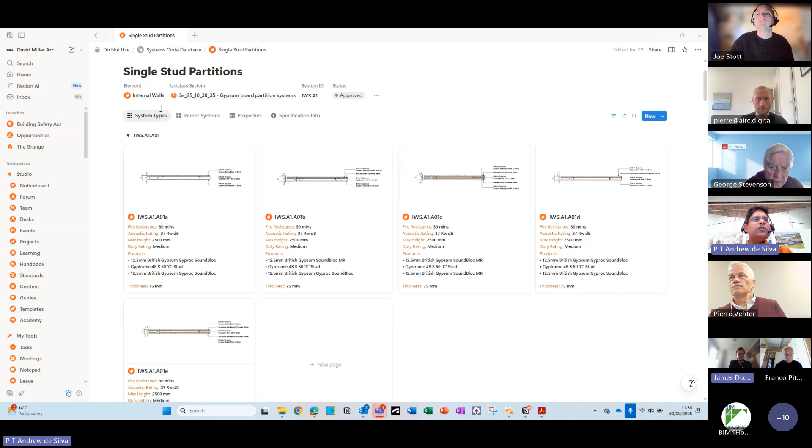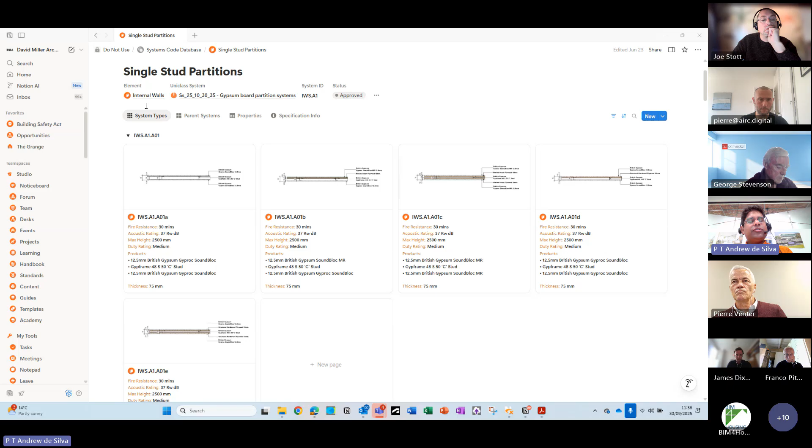Yeah. So we're creating content with the aim of making sure it's consistent, compliant, and aligned to the specification or digitally tagged. So this is the view into, for example, our internal walls. But within our content library, we've created not just things like walls, ceilings, etc., but also assemblies. So that could be, for example, bathrooms, which are compliant in terms of their geometrical relationship to different parts, the sink and the bath and the WC, etc.

So I think this is picking up on some of the things that have just been talked about, where Andy from the team has created a plugin into Revit, which means that all of our info is held in Notion here, but within Revit, the team members, and we're also changing the way that the team is structured.

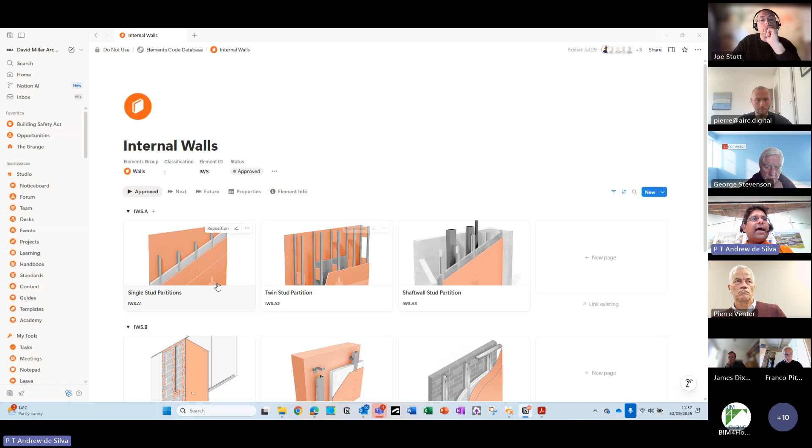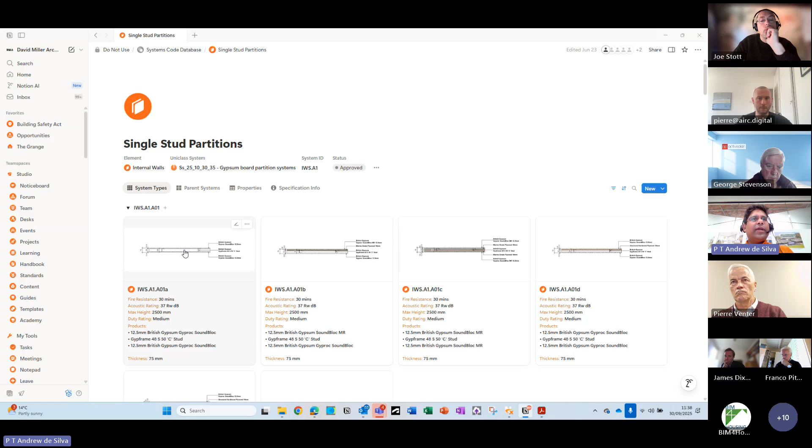But the idea is that you can go into this library, the content library that we've created, drill down into what is required from that component or assembly, and then choose the relevant one. And then when you bring it in, it's got the information, but it's also got the geometry, and it's also got things tagged and specified, linking it to our master specification already.

So that's something we've tried to do, and it's more powerful when we've got the assemblies, because there are so many permutations of an accessible Part M4(3) bathroom, and you would waste a lot of time if you're asking junior members to read Part M, trying to unpick the requirements, and then design it into one of the schemes.

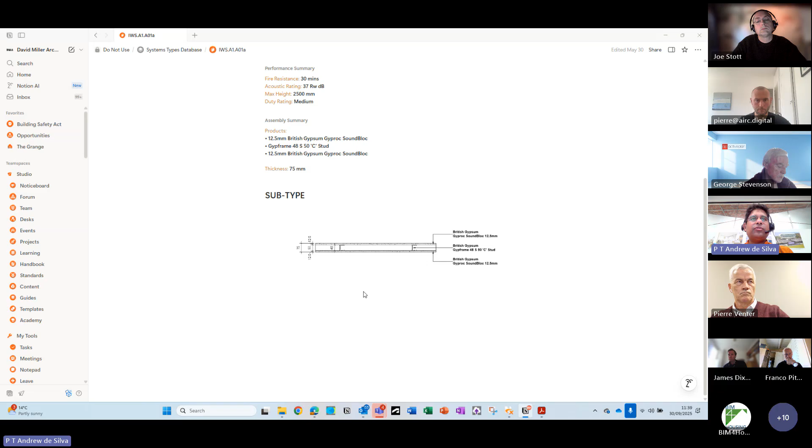So we're trying to get, whatever the sector of the project, a large amount of it pre-authored and created, which can then be brought in. Clearly, there's going to be bespoke elements, because all projects will have bespoke elements, and that's where the architectural interest or the site-specific requirements kick in.

And then Andy and Lee, who's the head of spec, and the R&D team are working to make sure that it is given a particular name, as you mentioned, so then it does allow a door to be aligned to the ironmongery set, to the specification, etc.

So that's something we've been doing to try and standardize the components and make sure they're all working or compliant, which helps us as a practice with the Building Safety Act, but also just generally meeting the employer's requirements or the regulations. So that's something that's been working for a long time.

Then coming back to the project I mentioned, this is a scheme, let's get right into it.

Sorry, James, got your hand up. I didn't realize it did that. I didn't realize it gave an automatic. Sorry about that. I love that.

The one quick observation: if you have the BG White Book product data reference in there, because that is the one thing that commercials will use to talk back. We do, yeah, we've got that in there as well.

So that's embedded. In terms of our little ecosystem of software, we've got Revit, we've got NBS for the specification side of things, and then Notion is what you saw. We use Notion like an intranet for all sorts of things within the practice, all centered around storing information in database format so that it can be machine readable, it can be filtered, it can talk to each other.

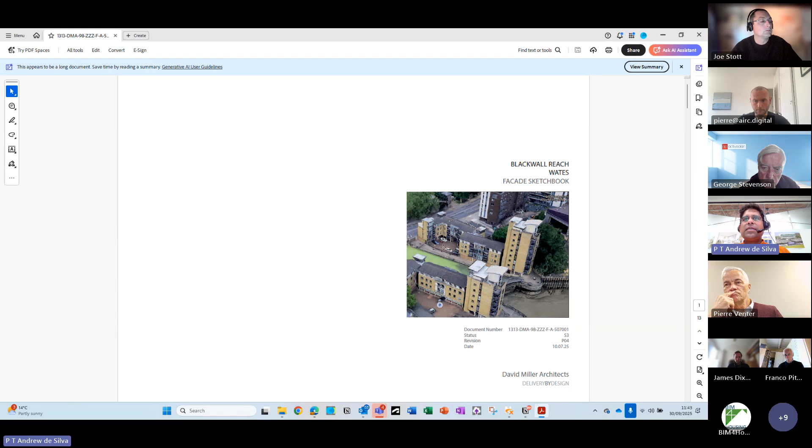trying to do generally. The good thing is that most of the building, from a combustible point of view, is brick. So actually, we're only talking about specific areas, related to this timber cladding and the timber decking on the balcony. So as a first pilot project that the team are going through, it's a really good one to do, I think. But it just shows you what complexities there still are.

So Wates had a point cloud survey conducted for the entire estate. Picking up on Pierre, some of the things you do, that surveyor then produced a Revit model. As you can see, fairly basic in terms of internal elements, but externally accurate geometrically, which is the key thing. And from that, we've then generated this document called a sketchbook, essentially looking at what are the different details that we need to resolve.

So one thing is the timber cladding facade. We've tried to look at what's existing, keeping in mind we don't have any as-built information. There are areas in here. Sorry, is that intrusive? How do you know the wall build-up from the point cloud? Good question. I'll come on to that in a second. So we've made some assumptions in here. All of the red text is assumptions.

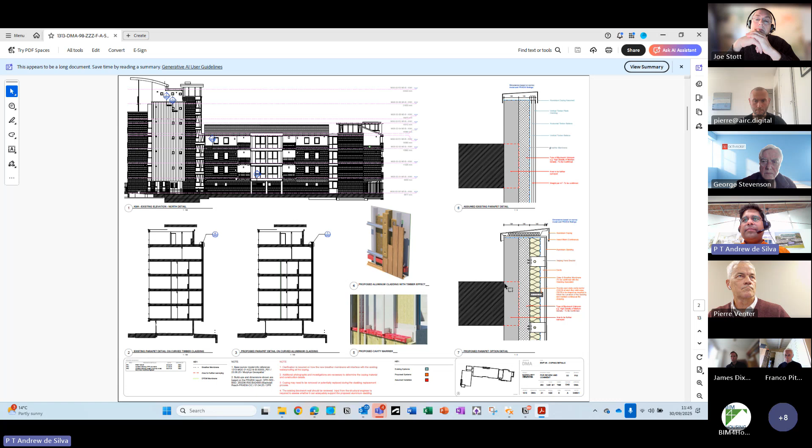Before we started, a company called OFR, who are fire consultants, did a fire risk assessment external walls review, which included some intrusive surveys on site from externally. So for example, that is why we know what the build-up of this timber cladding is. They cut holes in it. I'll show you some photographs in a minute as well. So some things we are able to know because they have been physically opened up. And then we were generating proposed build-ups, again based on a fair amount of assumptions, as you can see in the text here.

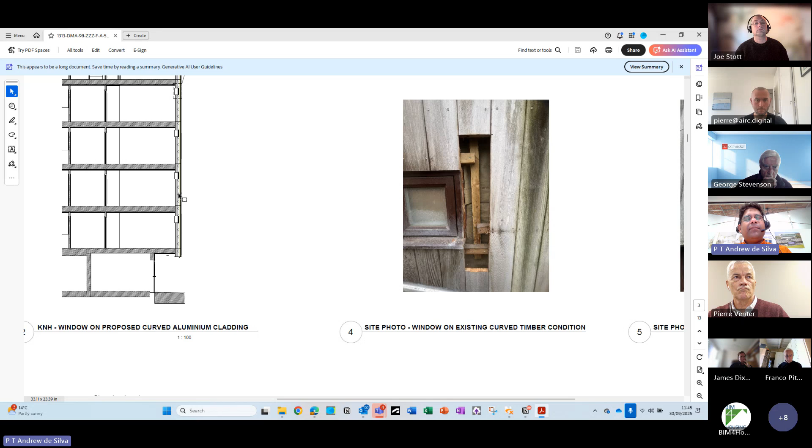So that's what we started off looking at. And you can see from these photographs, I'll just zoom in a bit. These were done by the initial fire risk assessment external walls. That enabled us to take the point cloud survey, which had generic wall thicknesses, 250, 280 mil thick. We then broke that model to create a more granular version of that external wall based on what we'd found. Still didn't give us the full picture. There were still areas which we didn't know, predominantly what is behind this breather membrane and how thick the blockwork is behind that. So that was basically where we started.

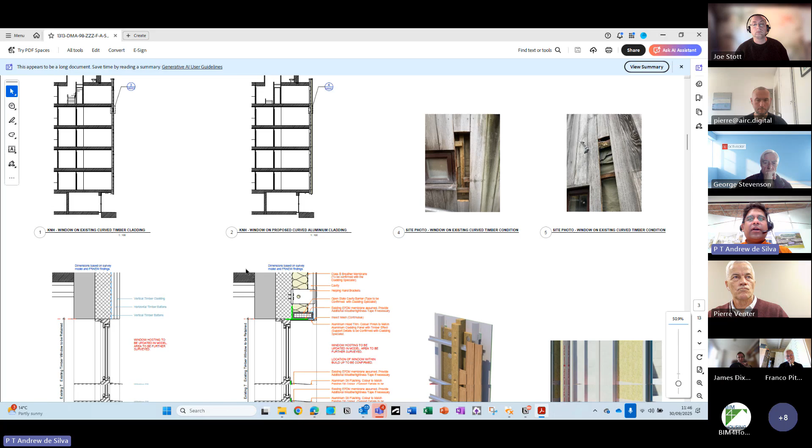Hold on a minute, so you can see that we've looked at those things and started to generate the existing and the proposed for all of the different areas within that curved timber. We also had some instances where there was an interface between the brickwork and render. So the areas that we were looking to do were essentially based on the fire risk assessment and areas that had to be remediated in order to make the risk tolerable, let's say. And the balconies all had timber decking, so that had to be removed.

And finally, there were areas where they found EPS insulation. Most of the scheme already had mineral, so that was good. But there were some areas, these projected bay windows, which had EPS insulation, for example. So again, we understood some elements of it, but not the whole picture. So that was quite interesting.

So these are the views from the 3D survey model. And we were identifying where there could be risks in terms of other EPS insulation, etc. that we may find. So I think what was good here is that even though the building was built only 25 years ago, from a data and information point of view, we had very little.

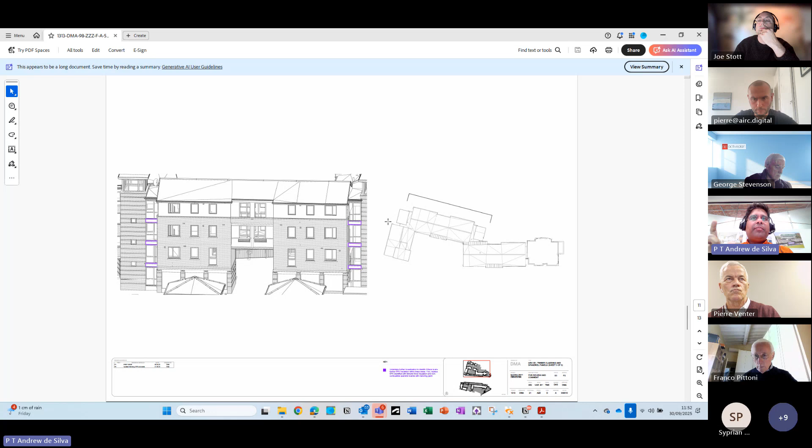No, I 100% agree, Cyprian. This document started a little while ago, based on what information we knew from the initial fire risk assessment external wall survey. What we were doing in this document is highlighting in all of these details, with the red, orange and blue text, which items we didn't know about, before we went back to site to do a further set of intrusive surveys because we had too many unknowns.

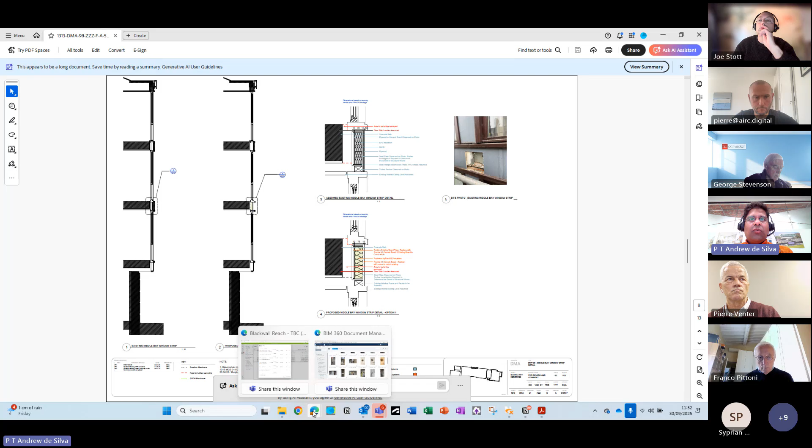So we had generated that report from the information we had at the moment. We then commissioned, with the structural engineer, ourselves and the fire consultants, a markup of those elevations to identify additional intrusive surveys we wanted, to pick up exactly that point you made about the unknowns. This might be a little bit slow to flick through the images. Let me just choose the one.

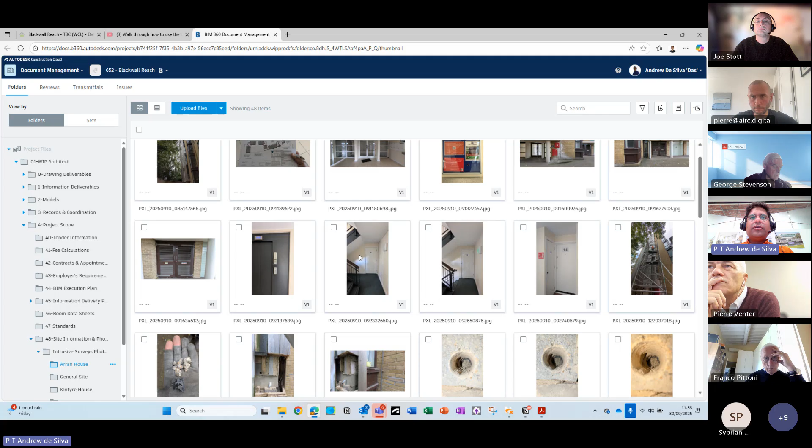So for example, because we weren't 100% sure, we knew what the timber cladding build-up to the blockwork was, but we didn't know beyond that. So we then went back and had a large area removed over two different areas in the two different blocks as well.

Again, to pick up on your point, Cyprian, about not making an assumption that just because it was built one way on one block, that it wasn't built the same way on the other block. So we opened up both of those blocks, and what was good is that we found the same build-up, i.e. essentially concrete slab, block work, these sort of steel posts, and then the timber cladding. There's no insulation on either of those.

What we didn't know was the thickness of the block work, because coming back to your point, James, the survey model was suggesting a 280 millimeter build-up from outside of the timber to the internal face of the apartments. And we were like, well, the numbers don't add up, because we had something like 50 or 100 mil timber, then that would leave somewhere in the region of 180 mil. But what was 180 mil based on? Was it based on, let's say, block work laid on its side, which was fairly common practice back in the late 90s, or was it 2 layers of block work, for example, or something else?

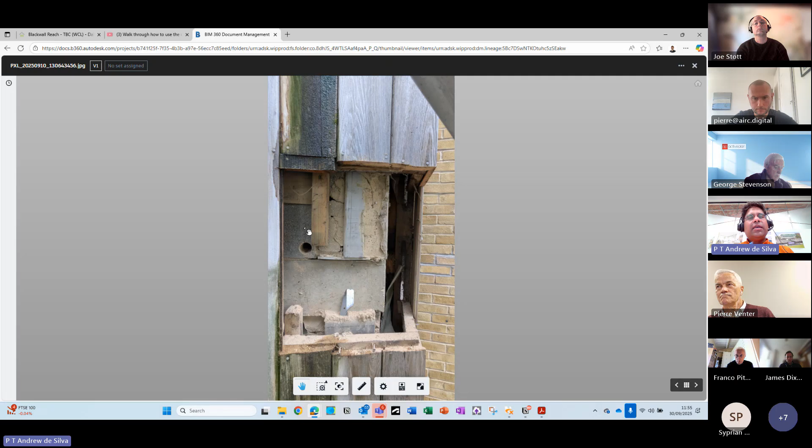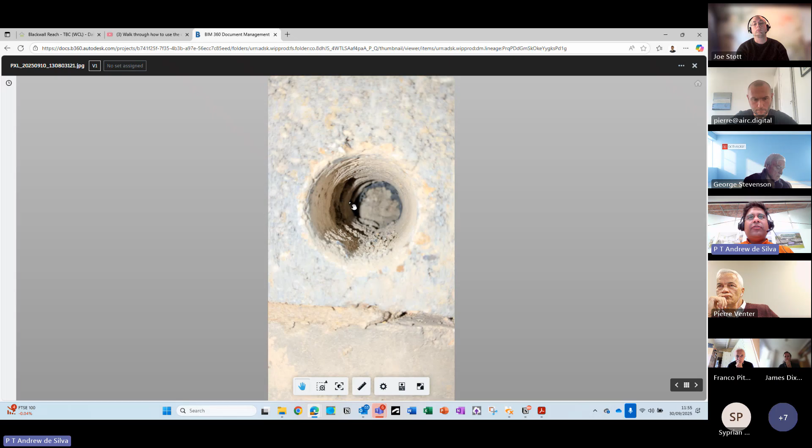So we had a core test done, which helped because the core drill was 150 mil thick. It showed that there was clearly one layer of block work, then a membrane, and then something else beyond it. Again, when you did the numbers, it wasn't quite adding up in terms of the survey model. So since this intrusive survey, we went through different parts of the different blocks. We have 3 different blocks that we tested on the opening up works. We're going to go back again to drill from the inside out, because there's still unknowns. And we're building that into our digital model from the survey that was done. So trying to fill the gaps, and each time we do some more intrusive surveys, we're picking up on something else that we need to know.

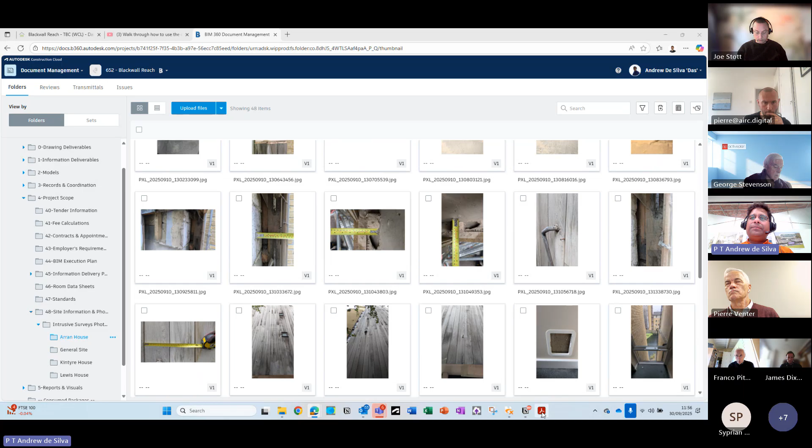To pick up that point, Syprian, that you made, I want to get to a stage where in our details and the specification, we don't have any red notes where we don't know what that build-up is. So all ambiguity has been taken out by carrying out surveys. The structural engineer is now doing the calculations in terms of fixing to the slab edge, which is probably the most realistic solution for the new rain screen cladding system. We can see from the surveys that the block work doesn't look like it's tied in very well to the slabs, etc. So we're bypassing that because there are too many unknowns, and going on to fixing to the slab edge. We've got to engage the specialist subcontractors, which will happen in the next couple of weeks.

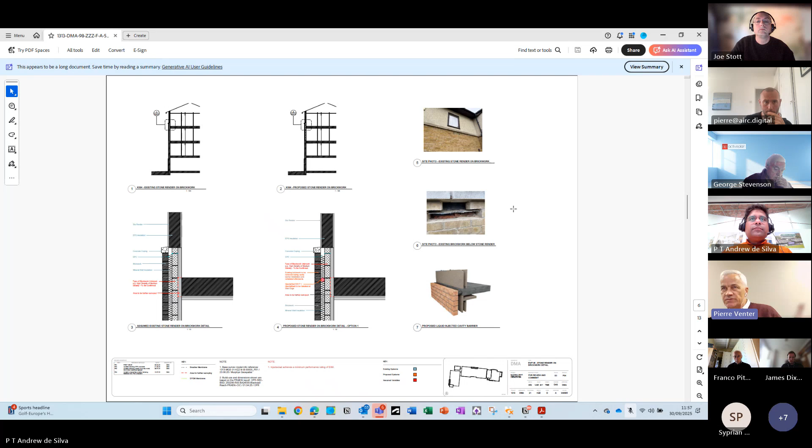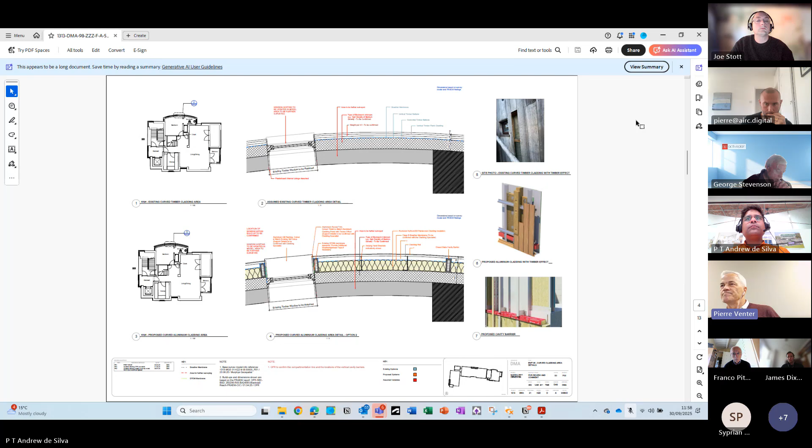Sorry, just a quick question. It's something that I'm busy doing at the moment, which is looking at the scan from the outside, and in those areas that you've identified at the earliest possible time, to scan from the inside. So you're actually getting the thickness of the build-up, in the same common areas across, let's say, 2 buildings before you expose it. It's been quite useful to look at what you anticipate being there and what did appear. But the bigger part for me would be a record for buildings in this particular location, this region, where typical construction methods might be pretty consistent across the board at different levels, tier 1, 2, and white van brigade, to give you some indicators of how things actually happened. That would be not an assumption so much, James, as common practice and an understanding. And that then becomes part of a guideline to say, consider this. That's it. Thank you.

No, that's right, Pierre, because what we found is, before we went onto site, the original fire risk assessment had opened up various things, and the weird thing was it wasn't necessarily exactly this bay, but in one of the bays, EPS was used as the insulation, and we were like, well, was that practice or that material used in other bay windows as well?

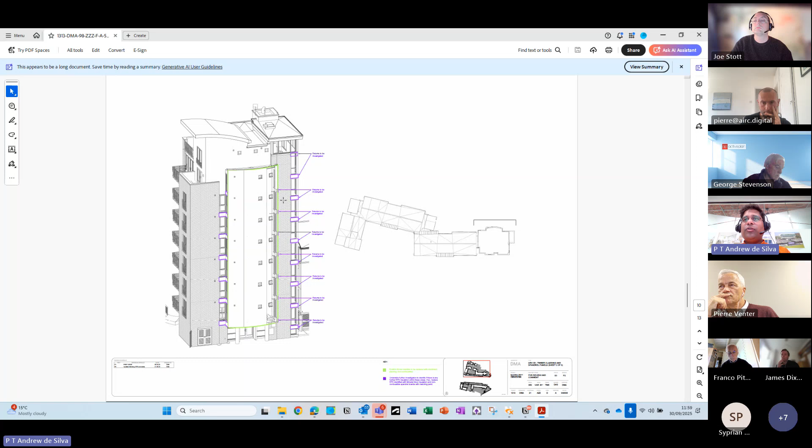So as part of the second intrusive survey, core drills were taken into all of these spandrels to make sure that there weren't any other areas where a bit of rogue EPS was thrown in by the contractor. Luckily for us, there wasn't any other found. It was just in that one bay that they had decided to use EPS rather than mineral wool, for example.

And that's also why we wanted to check across the two buildings to make sure that the timber cladding build-up was the same across both as well. Because clearly, one might have been built slightly later. There might have been some material supply issues, and they couldn't get everything in time, so they changed the material. So that's where the danger lies, and the need for quite expansive surveys to make sure that you haven't missed something, which then could be a problem when you get to site in terms of the change control things, Syprian, that you picked up and noted as well.

So we've still got a fair amount to go. And as you can imagine, there's elements internally that are also coming up, some maintenance stuff that clearly hadn't happened. So was it built properly in the first place, or has it simply not been maintained properly? So they're getting into grey areas at the moment.

But nevertheless, in terms of facade, we are needing to take, I think, one more round of intrusive surveys, and then feeding that into the structural engineer, the specialist subcontractors that'll get appointed, and the facade consultant to make sure that what we're putting back is compliant and is suitable for this particular building type. So that's kind of where we are in terms of that process.

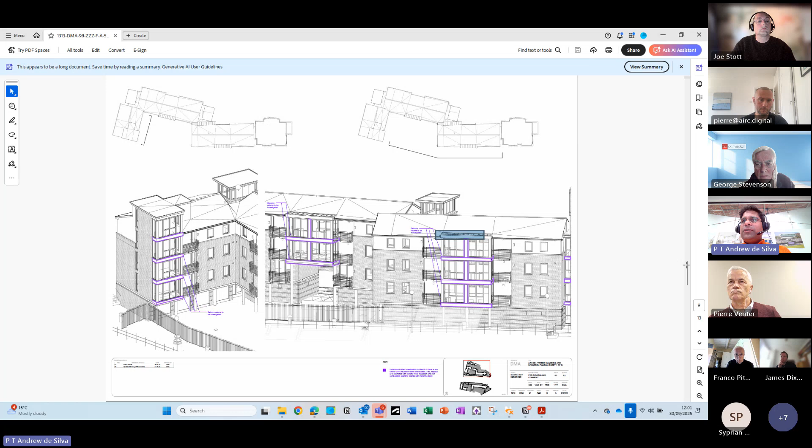James, you got your hand up? You mentioned material shortage. Were they two different buildings, the one at the front and one at the back? No, they were. If I just go back here, I would wager two different subcontractors built it.

I would think, first of all, I appreciate this is a remediation, but what it does reinforce is if the detail was to not have that membrane, then how is it possible that the building is actually constructed in some locations with that membrane? If you have a proper QA regime where you can evidence how you built something, you would flag something has gone in not by approved detail. There is clearly no QA if one facade that's identical to the next in a different location has been constructed differently.

Yeah, who knows what happened, because if they were using EPS on all of the building where that particular detail is, then that would make sense that maybe a different party were using it, but it's only in one bay of the entire two buildings. So again, we could go round and round trying to figure it out. But as I say, the bottom line, if you're doing the project now,

things like the technologies in terms of scanning, 360 photography, the time lapse, all of those things are what we're learning from this project, what not to do in terms of record keeping. So that's what you'll be doing as main contractor, to be able to evidence and strip back the time. A bit like Google Maps and its archived photographs. You can move the toggle and see what it was 20 years ago and what it is now.

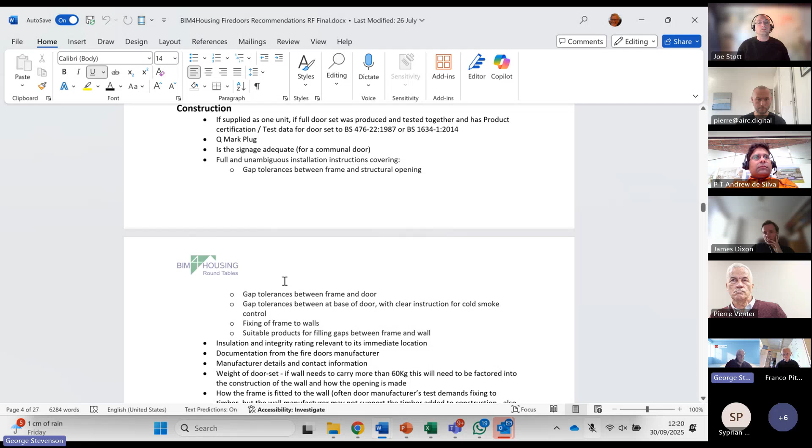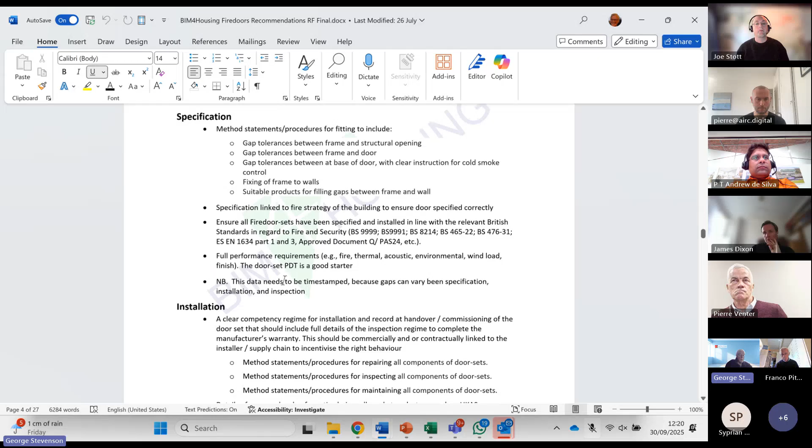Also, what information do you need from a point of view of specification, what materials are being used, the construction detail, the installation detail, inspection and maintenance. So we've got this level of detail, what tasks are needed, and then also what competencies are needed, and how should change be managed. So we've gone through that exercise with all those different asset types.

And last week we ran the workshops. They're all recorded. But what we've also done, which is new, is we've generated an AI podcast, really, that's been generated from the conversation. And I have to say, I think it's extraordinary. And if you're interested, I'll send it to you. But the reason I'm saying all this is that this, I think, is also part of the whole process.

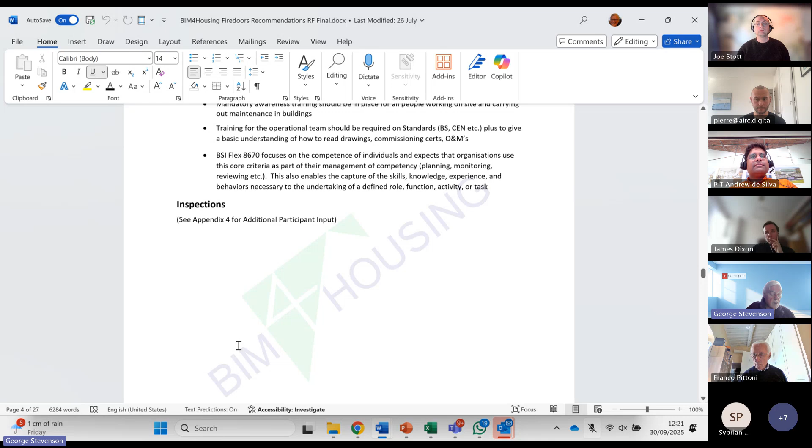And you'll see there what we also did. We broke the asset types into groupings. So that's compartmentation. That's largely smoke control. Here we've got sprinkler systems and risers. And here we've got lighting and emergency lighting and escape signage. So I have to say that we didn't get onto that because we spent all of our time really on fire doors and the like. But this is available. So I don't know if that interests anybody, but I think it's useful stuff.

Yes, please, George. That's brilliant. Thank you. We've also got a group starting in a couple of weeks' time on lifts. So this is a brand new one. So we're going to have a group of people who are subject matter experts on lifts telling us what information is needed. That would be fantastic, because working with lift manufacturers in this context is extraordinarily difficult. Yes, they don't want to play at all. Yeah, we seem to be breaking through that, James.

So, you know, if you want to be part of any of those, the first thing is to obviously be able to use and access what we've already produced. What we're also doing from that exercise, we're going to spin things off, because what we want to do is start creating AI agents that can then interrogate that information and then identify what's needed and what isn't needed. Because the challenging thing that I'm coming across all the time, it's the interrelationship of this information that is so critical.